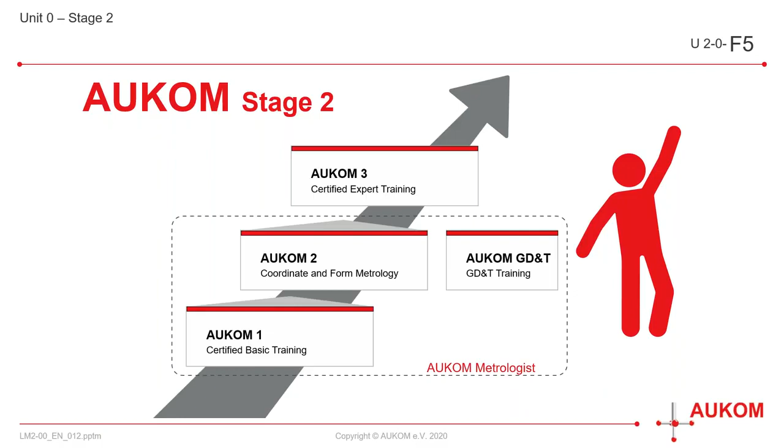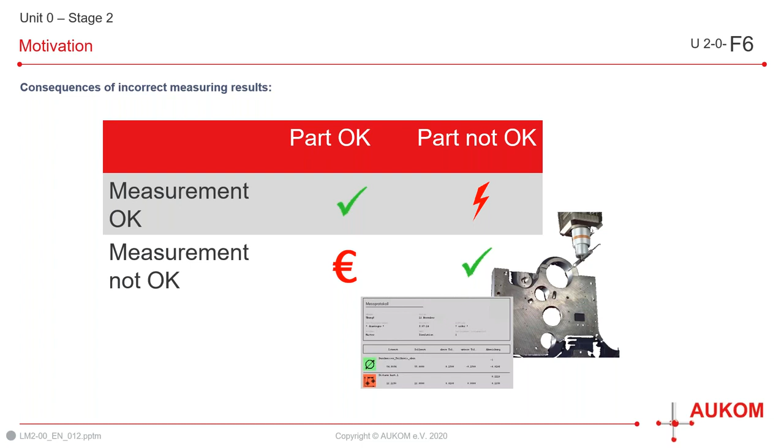But if the part is not okay, and we say that the measurement is okay, this can be dangerous. And we can see failures in the field. You see all the recalls maybe that you've seen in the news for different industries, and people can actually get hurt. Conversely, if you say that the measurement is not okay, but the part is actually okay, this can be costly because then in your process, you're chasing your tail and you end up wasting time, money, and energy. What we do want is, if the part is not okay, to also reflect that the measurement is not okay.

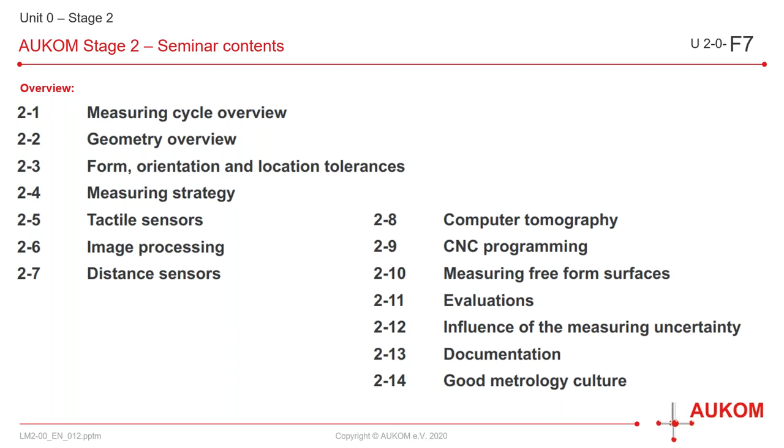And we throw some more math at you when talking about evaluations and measurement uncertainty. Don't worry though, nothing which you'd need a calculator for. But again, all of this is so that if you come across this, you know exactly what to do.

And Mariano, you mentioned that there's an exam at the end of the course. Do you do anything to help your students prepare for this exam? Yeah, totally, Jonah. So we have end of unit questions for all the units except the first and last ones because they're shorter, they're introductory and conclusion units. We also have a practice exam that I give to students the day before the test, a copy if they'd like to take it again and study overnight. And we review before the exam itself as well so that we can make you successful come test day.

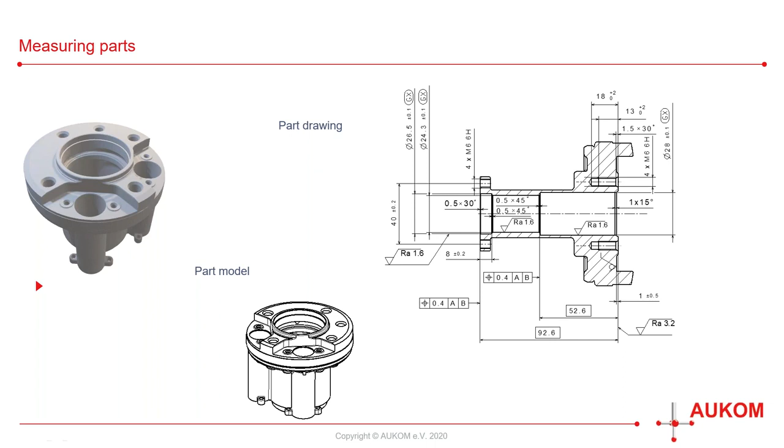All right, now we'll get into some awesome AUKOM. So the topics I'd like to train you on today is from a section of Unit 3, which has to do with form, orientation and location tolerances. But I'm just going to give you a snippet of the form tolerances, in particular straightness.

These are the controls that you'd want to use when the shape, if you would, of your part needs to be constrained. So the picture you see of this cylinder, which to the eye looks perfect, is really not so perfect in its shape when you look a little closer. Next to it is a graphic, which is exaggerated and is really what we want our metrology software to show us. The true form, which in this case is trilobish, if you would.

So this is very clear when we have enough data, which we touched on a little bit yesterday in our AUKOM Level 1 presentation. Yeah, so Mariano, before we go any further, what could cause this type of distortion, what we see on the right-hand side of the screen here? I'm glad you asked, because this is also something we touch on in AUKOM. This particular deformation could have been from vibration during machining or over tightening of a 3-jaw chuck during production.

So it's easy to comprehend how these errors can come about, but it's also easy to overlook and also literally look over when it's not presented in such a way. You might have production personnel who don't want to look at this data because they're not sure what they're looking at. So what we're able to provide in the quality department with software like ours is a magnified color graphic, maybe, right, showing the deviations from the nominal element, for example.

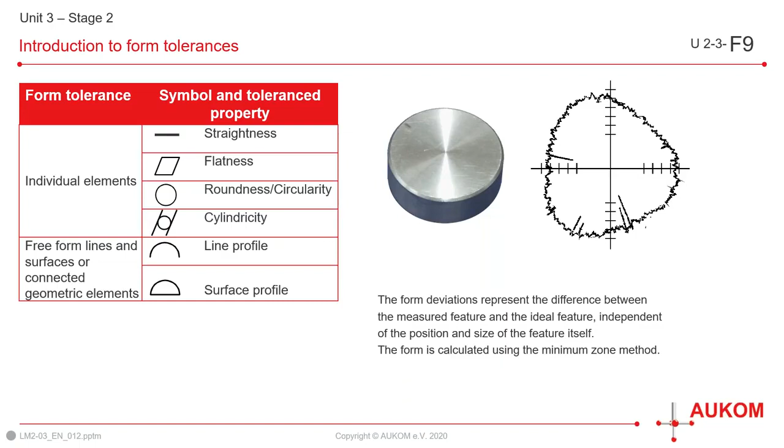Take perpendicularity for a moment. You'd say, how perpendicular is this axis or something to a plane? So then I need a datum. So this is when that concept clicked for me and made it easier to understand other concepts. As a last comment, you'll notice that the last sentence of the statement at the bottom right says that the form is calculated using the minimum zone method. Yeah, or the Chebyshev, which we discussed yesterday during the AUKOM Level 1 training. Yeah, so it just goes to show you how all of this builds on itself.

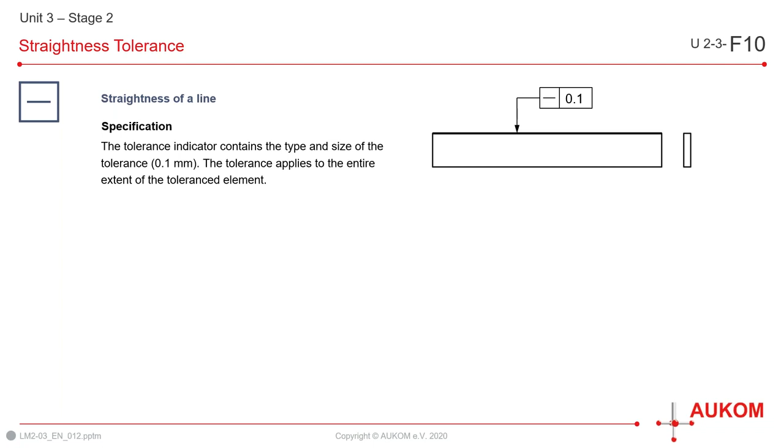So let's look at how straightness can be applied and how it works, which I really enjoy how it is presented, just like in the ASME Y14.5 standard: this on the drawing means this in real life style.

And I realized I just called the standard enjoyable, but someone's got to do it. I think I'll be the nerd. Although if I'm going to call myself a nerd, I might as well go the whole way and say that I have gotten certified to the 1994 ASME Y14.5 standards to the technologist level. So I'm going to defend my title.

But although the ASME standard is mainly what we use here in the US, there is also the ISO standard that is used internationally. So AUKOM has made the effort to distinguish the differences, if there are any, throughout the course. And so here, to go into the straightness call out that we see on this simple part, it's kind of a thick ruler, we have the straightness call out pointing to a plane here. And so we want to figure out what it's trying to tell us.

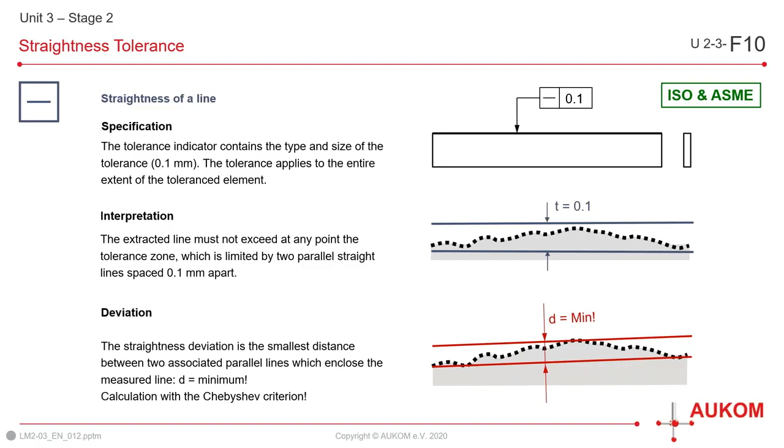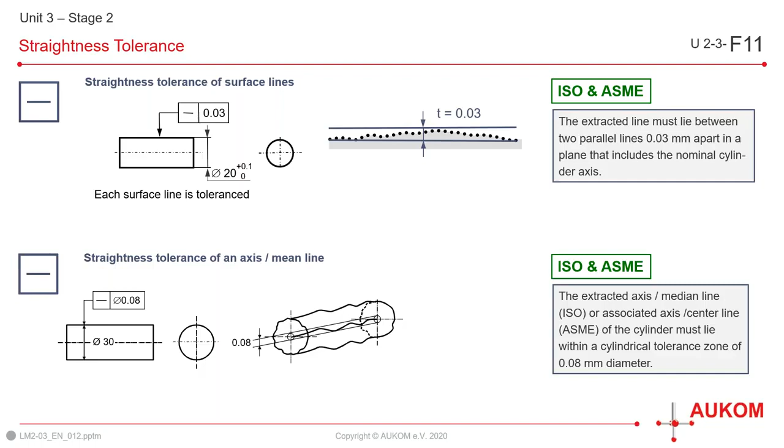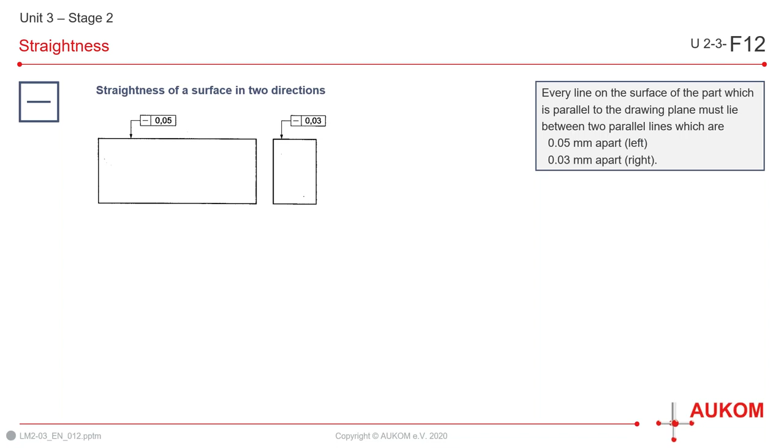So then we have a scenario where we're kind of going back to the first one, straightness on a plane, but it's showing in two different orientations. So we have one way, straightness of a plane, any cross section on the plane to 0.05, whatever units it is, and then 0.03 the other way.

So the other thing that you would notice about the AUKOM courses is that it's manufacturer neutral, is the term that I like to use. So much so that in level 1, we've taken out any branding from all pictures and made them look more generic with grayscale colors, because again, the focus is on the training material. We want to get that same foundational knowledge to everyone.

And furthermore, you'd be glad to know that students are getting the same exact content, not only anywhere you get trained in the world, but no matter who trains you, since that's what AUKOM seems to accomplish throughout the industry. So if you have the same part that's being measured in Madagascar and India, then you're going to get the same correct results at the end of your measurement reports.

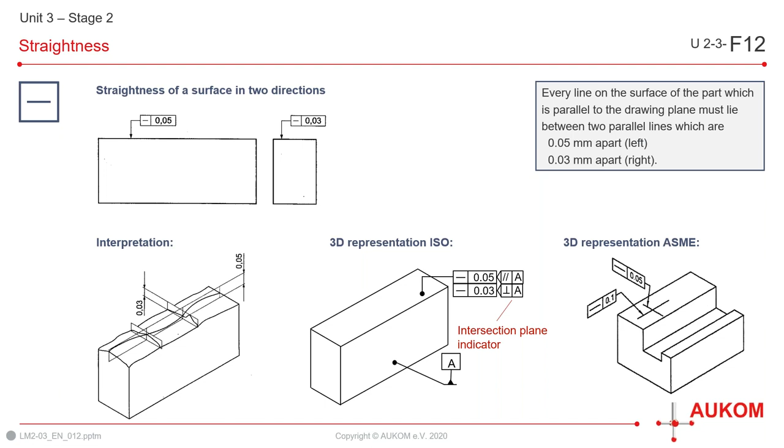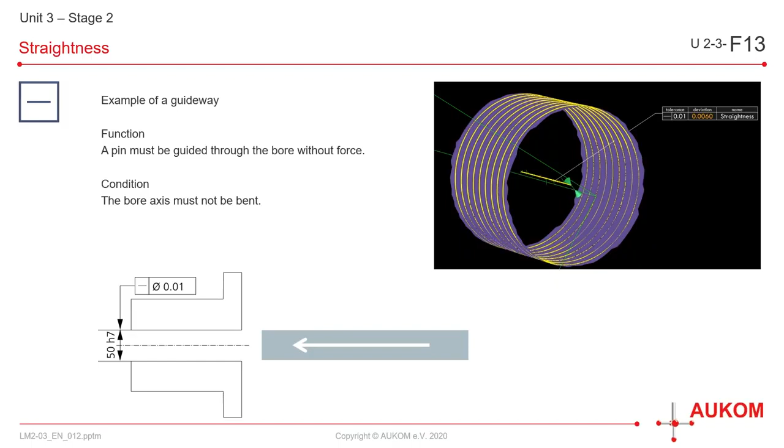So if it's a scanning sensor, they'll ask another student that has a scanning sensor how they go about their inspection, maybe the speed of their CMM, the type of stylus they use, how many points they're gathering, because they're all from different backgrounds. They have different machines, different sensors, and they measure different parts with different materials. So they end up learning from each other. And this is really the greatest thing about AUKOM, that we can come together to have the same understanding about our own process, which in the end makes all of us successful, I think.